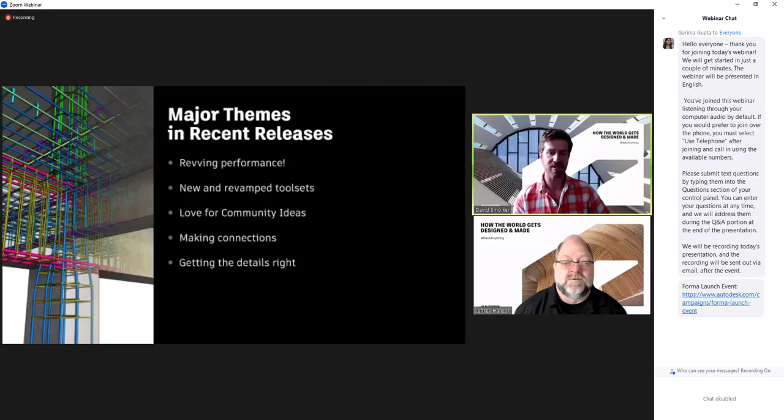So I work with the user community and our development teams to design content and learning experiences to enhance the user experience of Revit. And Jeff, when we talked about this webinar, I asked you to put together a list of ways Revit has evolved significantly in the last handful of releases. Now here is that list. Now let's start getting into it by talking about performance.

Yeah, so you experience performance every time you're using Revit, right? Our development team works really hard in the background on performance enhancements to overall improve your experience while using the software. Whether you see that or not in a feature, it's happening. And we're trying to keep your teams productive and on task, not waiting for Revit.

So when you add up all of these little things that we've done for performance over time, it really ends up being quite a lot. And in the end, you're not waiting for Revit anymore. Revit is waiting for you. Yeah, and that's great news for everyone using Revit. What else made your list, Jeff?

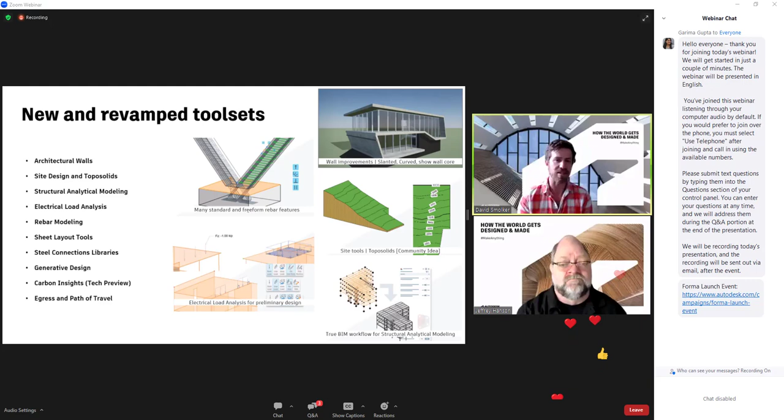And we're liking the feedback we see related to Revit 2024. In particular, we've seen improvements in CSAT—customer satisfaction—over the last couple of releases. So we're really making a lot of progress here. We have a lot of momentum with the way Revit is improving. Now, Jeff, I want to get to the next item on your list, which is data and connections.

Yeah, so to make things easier to work across broad teams and geographies, time zones, we've really made some significant changes in making Revit more open and more integrated with applications that you're already using. We've expanded upon capabilities with new tools like data exchanges, SpaceMaker, Twinmotion, Autodesk Docs, IFC. The list really goes on and on, with things we're doing to make it possible to work across teams easier.

And we know we have to evolve that way, Jeff. We see the need from our customers for more open workflows and a more open approach to navigating the AEC software ecosystem. So let's wrap it up by diving into the details. What are you seeing when it comes to the core design-to-documentation functionality of Revit that's improving recently?

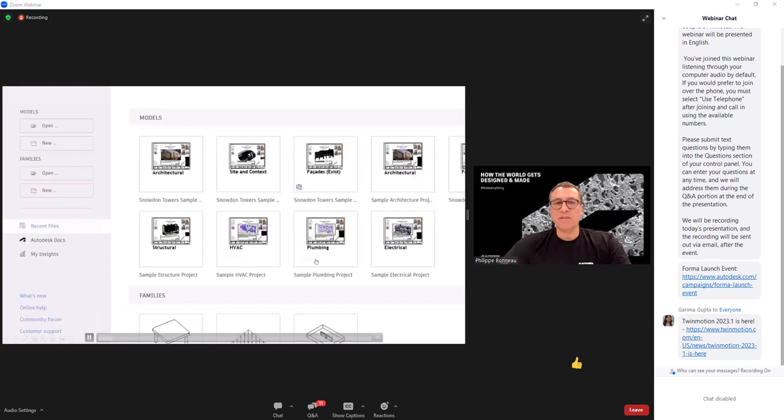This information is represented with insight cards. You can react to these cards, and you can click the Learn More button to get access to additional online content. You'll find the My Insights tab on the bottom left corner of the home page, and from there you can access a dashboard with commands that you are mainly using in Revit.

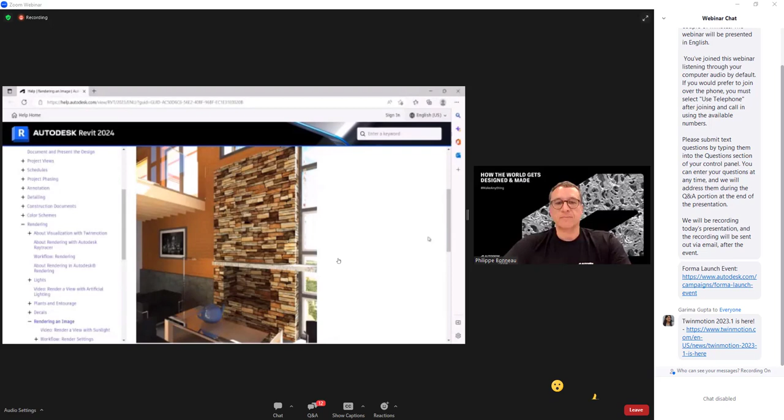Revit now supports the dark theme for first-level user interface, including the Properties Palette, Project Browser, Option Bar, Status Bar, and View Control Bar. You can set the drawing area theme from the ribbon, or in the Options dialog, where you can configure whether you want dark or light mode. The dark theme is also implemented with redesigned icons for both light and dark themes.

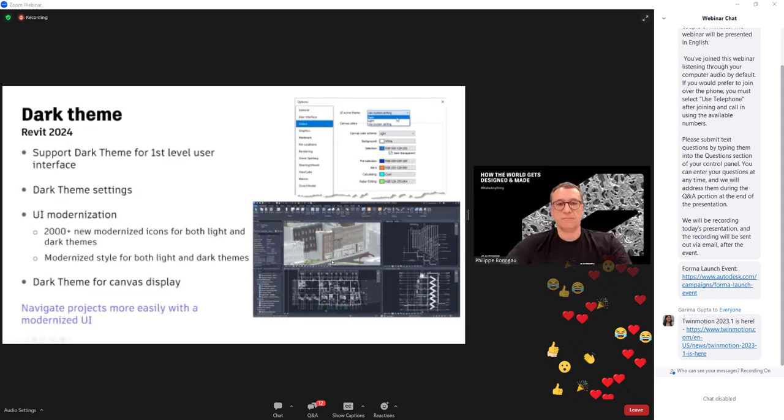If you go to File, Options, under the Colors tab you'll see new settings to define the theme as dark or light. Once this is done, you can also change the canvas theme to dark or light afterward from the ribbon.

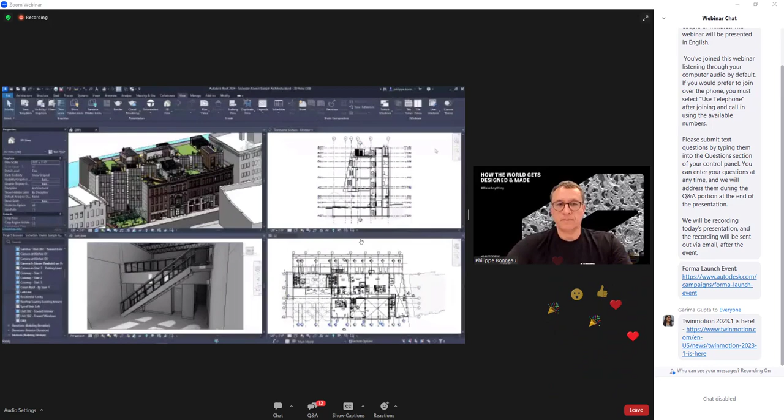In Revit 2024, we also have new sample models and new project templates. The sample project is a mixed-use project incorporating commercial, residential, and retail, distributed across several Revit models in keeping with industry standard best practices. If you wish to open the entire project, you can open each model individually or link them all together. The models included are architectural, site, structural, MEP, and also a point cloud RCP file. The goal was to create a compelling sample project that was interesting from both architectural and engineering perspectives, showcasing many of the most commonly used features in Revit.

We also have new project templates, with a new Imperial and metric English template, which are included with the standard installation.

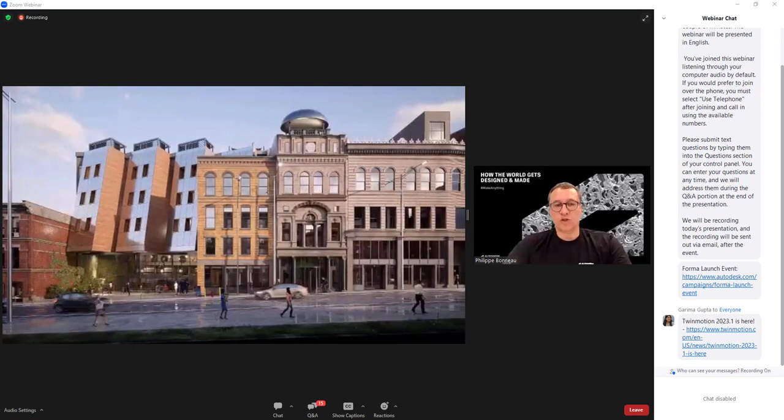If you want to find the templates and samples, just go to the samples folder. You have a cover sheet which shows the project in detail, and you can see how it looks in Twinmotion for Revit.

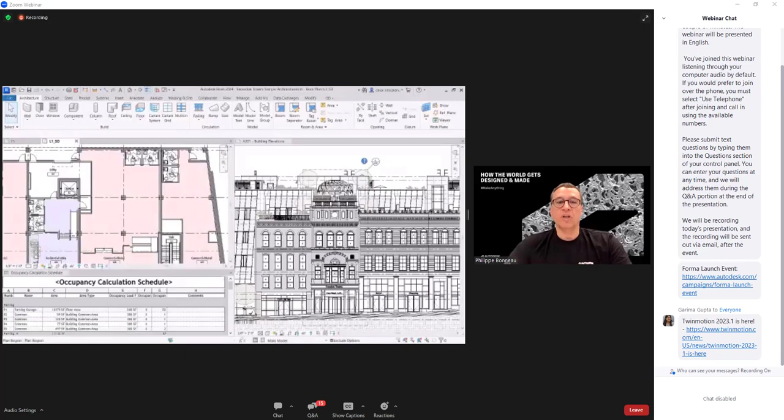With those projects, you have access to many 3D views, 2D views, documentation, and schedules. You can also find the point cloud file used to create the facades, and see how the structural and MEP models look.

The project browser has been modernized. We have a search function now available at the top of the project browser, so as you type in the search box, it shows only the entries matching that search term. This is very useful when you have a Revit project that may contain hundreds or even thousands of views, sheets, schedules, and families listed in the project browser.

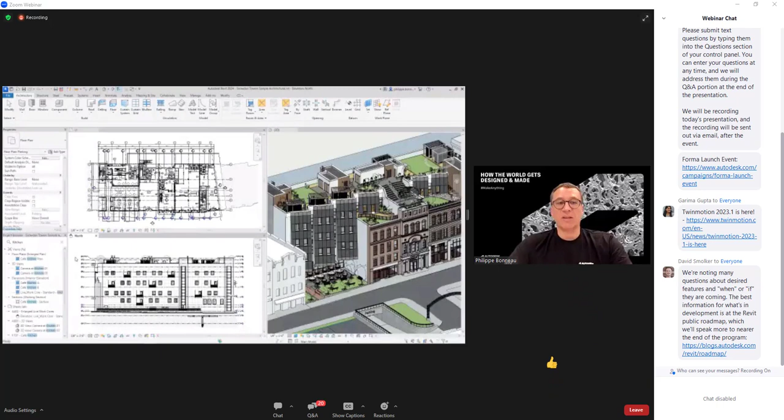Let's take an example. If I type L2, I can see very quickly views, sheets, and families which contain this word in the project browser. Another example with kitchen — so it really helps finding the right content in the project browser.

In previous releases of Revit, it was possible to link a Navisworks file from your local machine to help coordinate in 3D. In Revit 2024, the new link coordination model feature with files hosted on Autodesk Docs makes it easier for project teams to work together, keeping project files light and your work in sync with other collaborators.

You can link directly into Revit models and views from any of the 60-plus file formats that Autodesk Construction Cloud supports with Autodesk Docs. You can also underlay the coordination model as a visual reference when designing in Revit. And good to know, you can now link different versions of Revit models hosted on Autodesk Docs for coordination.

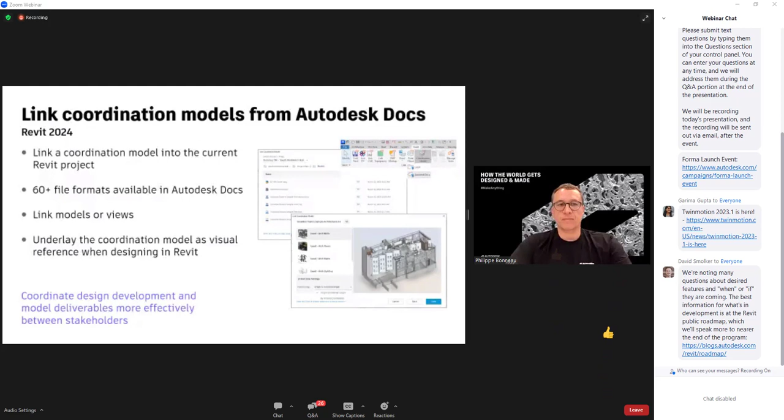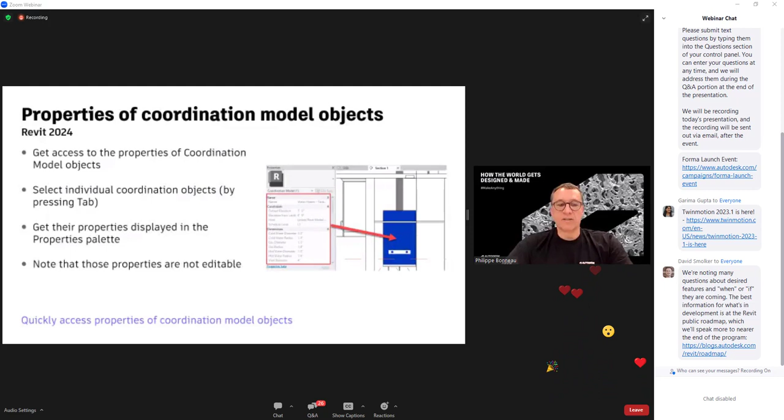You can view the properties of individual objects from a coordination model. Just select one of the individual coordination objects with tab, and you will get the properties of this object displayed in the properties palette.

You can also snap to points of a coordination model. This is controlled by a new Snap to Coordination Models option located in the Snaps dialog box. As an example, you can use the measure tool to get a distance between one object of your Revit project and another object from the coordination model.

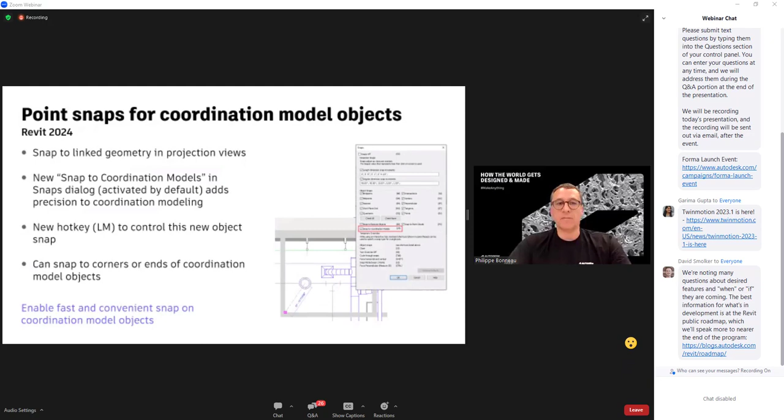As you can see, if you go to Coordination Model, Autodesk Docs, you can navigate through your folder. You see a lot of file formats hosted here on Autodesk Docs. We can, for example, use the one from the structural team.

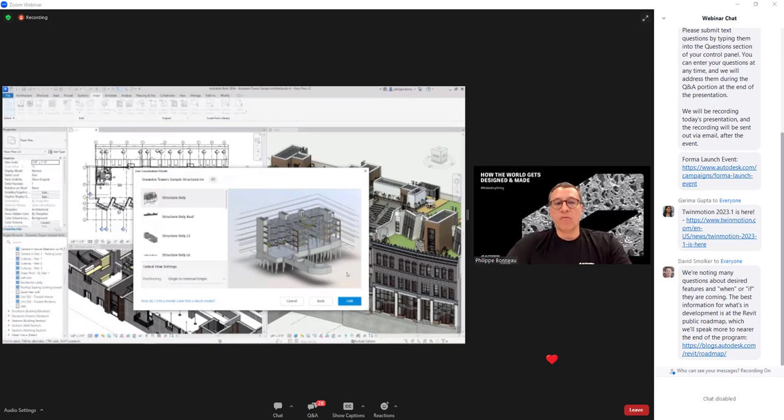Either we link it to the entire model or just a view, for example just a level. As you can see in all views here in my Revit project, I now get this coordination model linked. I can select one of those objects and get access to its properties. And I can snap — as an example, using the measure tool, I can get a distance between this object from the coordination model and the wall which was part of my Revit project.

Link and import PDF files is now available for our Revit LT users as well. You can use PDF files as a background in a floor plan, for example, or use it to trace existing conditions. And Revit will snap to PDF lines if vectors are embedded in the PDF file.

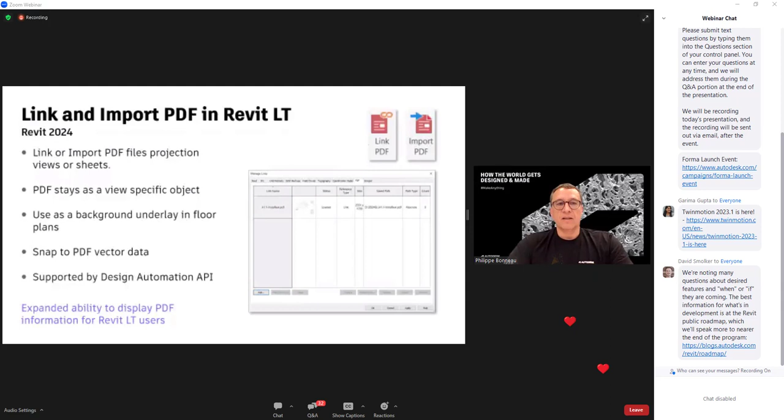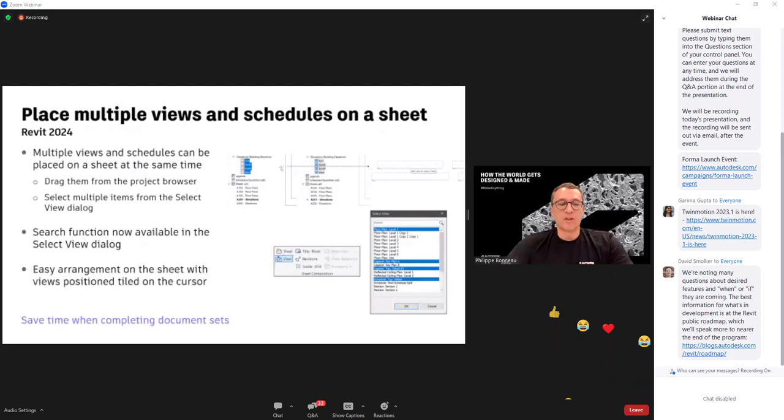Now let's talk a little bit about documentation. In previous releases, you had to place views onto sheets one at a time. In Revit 2024, you can place multiple views, sheets, and schedules on a sheet in the drawing area at the same time, for example with the drag and drop functionality from the project browser.

The Move View Align to Sheet command was introduced in the latest release, and in Revit 2024 it has been enhanced and generalized to Move Align to Sheet, expanded to support moving views, schedules, panel schedules, detail groups, and many more. Now you can easily move multiple elements between sheets while keeping their original positions.

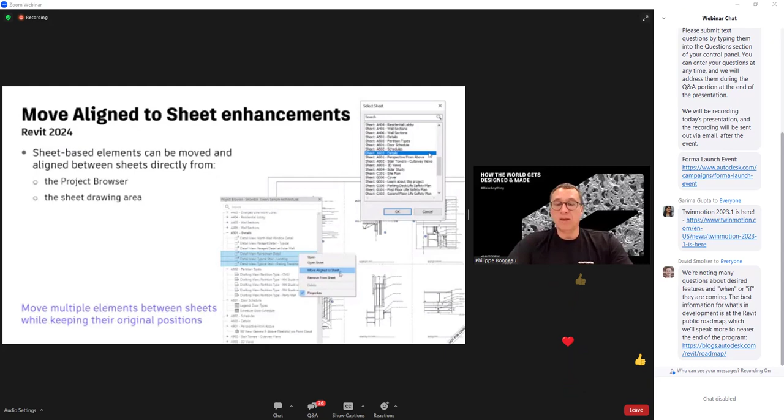We now have an Open Sheet command, available in the contextual menu, which means you can open a sheet directly from the drawing area. If you select multiple views or have a view on multiple sheets, a confirmation dialog gets displayed with the number of sheets that will be open.

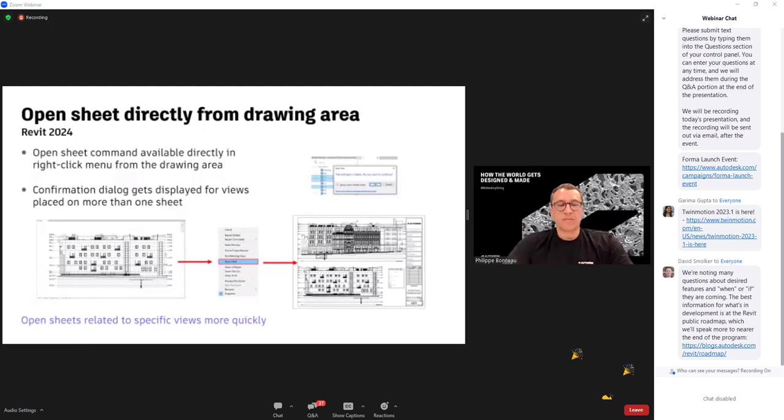You can now create a schedule of revision clouds. A new revision clouds category is available for schedules. You can use fields not only from the revision clouds, but also from revisions, views, and sheets to create your schedule.

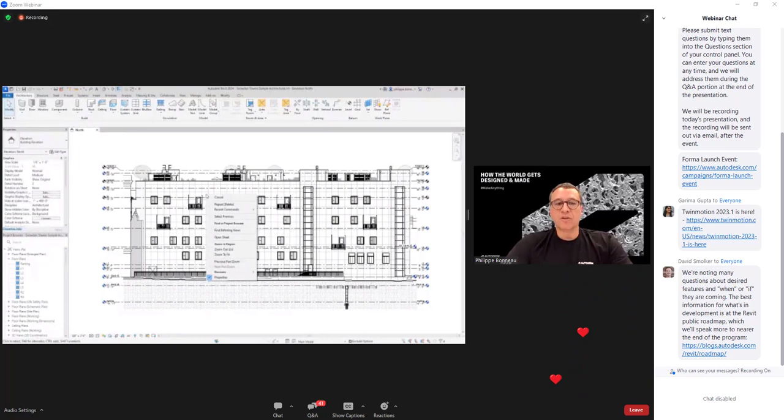Let's see how we can place multiple views and schedules on a sheet at once. It's much easier now to create your documentation. You can move views, schedules, and images from one sheet to another and get them aligned. You can select a view in the drawing area and right-click to open the sheet where this view is located. You can also create a schedule of revision clouds, selecting the fields you want to display, to get something like that.

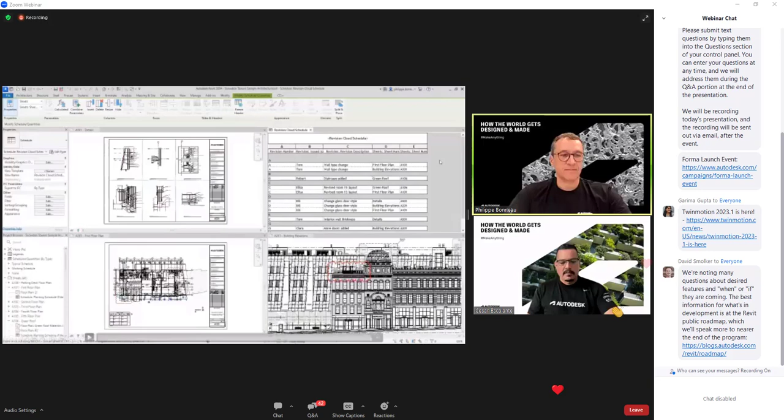Let's now take a look at what's in store for architects this year, and in particular for landscape architects.

New color book browser. This replaces how you can select colors. We have improved access to Pantone and RAL colors and made it easier to add custom-made color books. Use the Autodesk Color Book Editor to create your custom color book files. This is a web app available under the link displayed on screen, and it's been around for several years already. You can apply consistent corporate or branded color palettes in Revit by placing a .acb file under the file path C:\ProgramData\Autodesk\Revit 2024\Color Books.

Revit 2024 introduces a new visual style in response to customer ideas. Use the new textures visual style to apply the texture of render materials without lighting effects. This style maintains a consistent appearance of textures in the scene so materials are always displayed the same way no matter how they're oriented to the light source. This style expands your ability to create impactful representations.

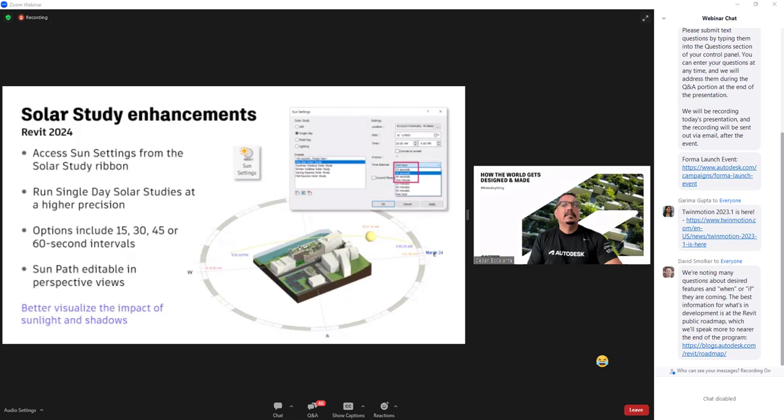The Solar Study user interface received several enhancements this year. Now you can access the sun settings dialog directly from the ribbon. Single-day solar studies reveal time intervals down to seconds—you can choose between 15, 30, 45, or 60-second intervals. Also, the sun path is now both accessible and editable in perspective views.

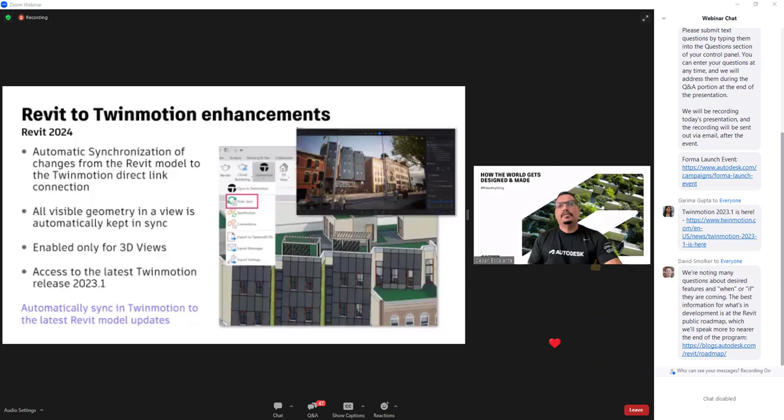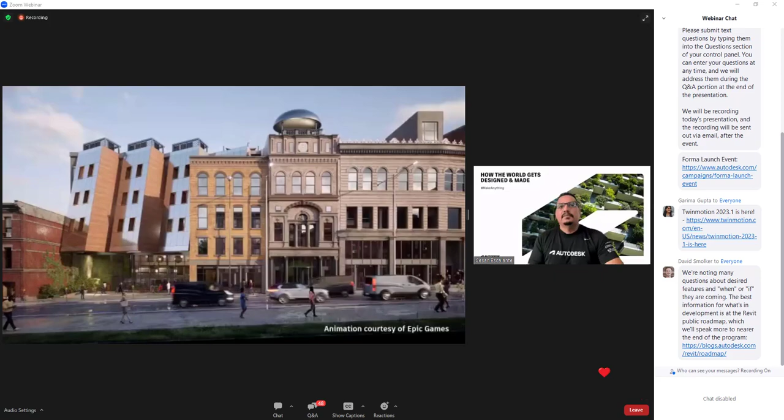Last year we announced the release of Twinmotion for Revit, which makes Twinmotion available at no cost to all our Revit and AEC Collection subscribers. This year, AutoSync functionality has been added to the Twinmotion Revit add-in. AutoSync supports automatic synchronization of changes between Revit and Twinmotion. A 3D view needs to be active in order to enable AutoSync. All visible geometry in Revit will be automatically kept in sync with a view in Twinmotion. Expedite your rendering updates and create better visualization with the AutoSync functionality of the Twinmotion add-in for Revit.

One of the most highly anticipated capabilities in 2024 is the introduction of new site design tools. Welcome TopoSolids. TopoSolids are a new category of families built as solid geometries. They have instance and type parameters and can represent diverse types of surface sections—for example, roads, sidewalks, soil infills, grade slabs, sports fields, water bodies, etc. Each type can be represented by different compound layers or different contour line representations. TopoSolids can be set up as room-bound elements suitable for open space programming. The instance properties of TopoSolids report a variety of dimensional parameters, including slope, perimeter, area, volume, elevation, and thickness, among others. Let's take a look at how TopoSolids can help improve your design documentation.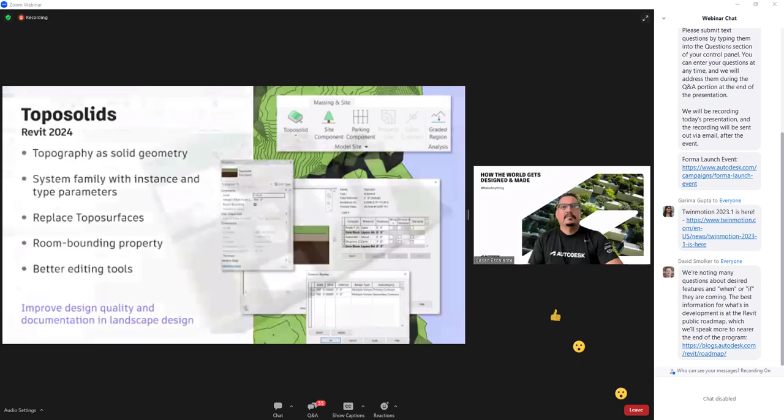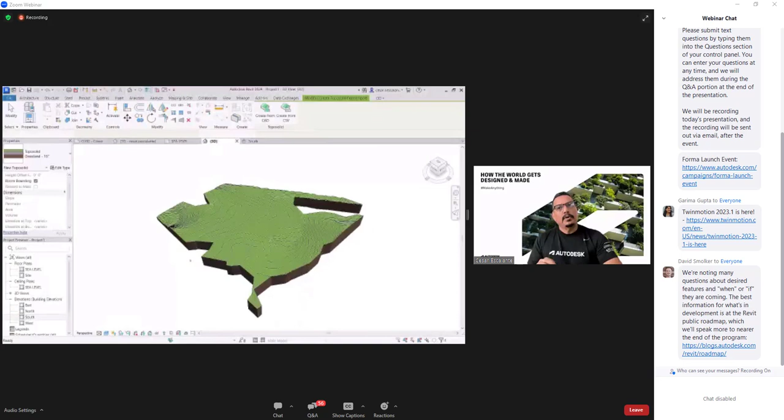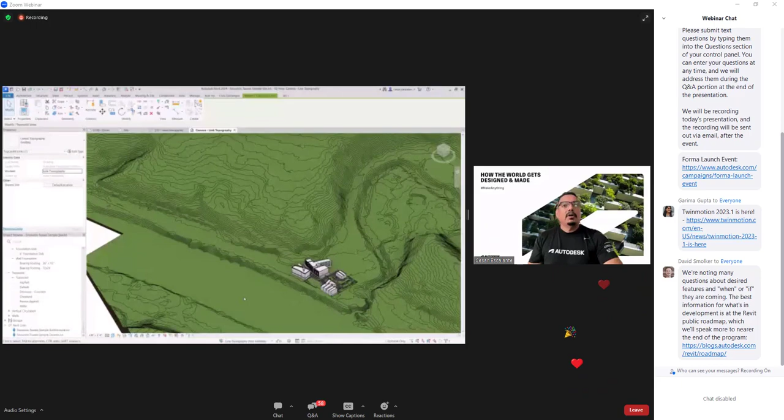The new reorganized icons under the Massing and Site tab reflect the new site design capabilities. There are two methods to create a TopoSolid: sketch the boundary and define elevation points, or create it from an imported file, either by CAD import or a point file in CSV format. TopoSolids replace the TopoSurface functionality from previous releases and are now represented as solid geometry. TopoSurfaces upgraded from previous versions can be converted into TopoSolids with the Generate TopoSolid contextual tool. You can still access the legacy TopoSurface settings. Linked topography generated from Civil 3D and hosted in Autodesk Docs will be automatically converted into a TopoSolid, and the property line data settings are now available as a standalone drop-down panel.

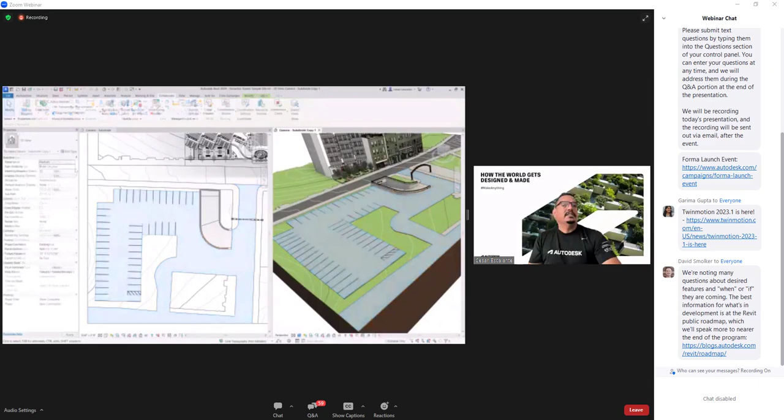Subdivisions. A subdivision is an offset region derived from a TopoSolid—for example, you can use a subdivision to draw parking lots, roads, or islands within a TopoSolid. Use the instance properties of a subdivision to apply a different material. The subdivision is positively offset from the original surface and must have a thickness larger than zero. The inherit contour toggle will display contours over the parent TopoSolid of the subdivision surface.

Boolean operations. Building pads are now retired, but existing pads in upgraded models can still be edited, though you won't be able to create new ones.

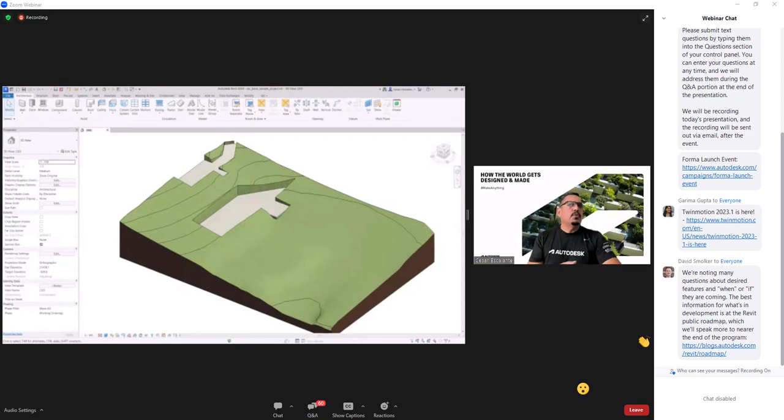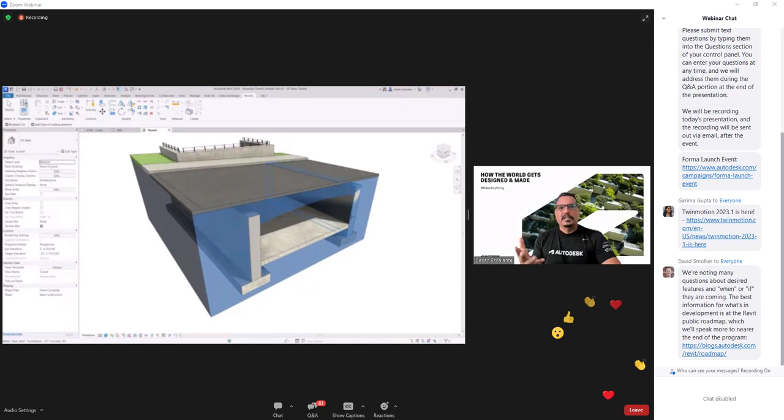To represent an excavation or a tunnel, cut the TopoSolid using in-place void mass families. In addition, you can cut a TopoSolid with elements of other categories, including other TopoSolids, ceilings, floor, slab edges, roof, fascias, gutter, soffits, structural foundation, walls, and wall sweeps.

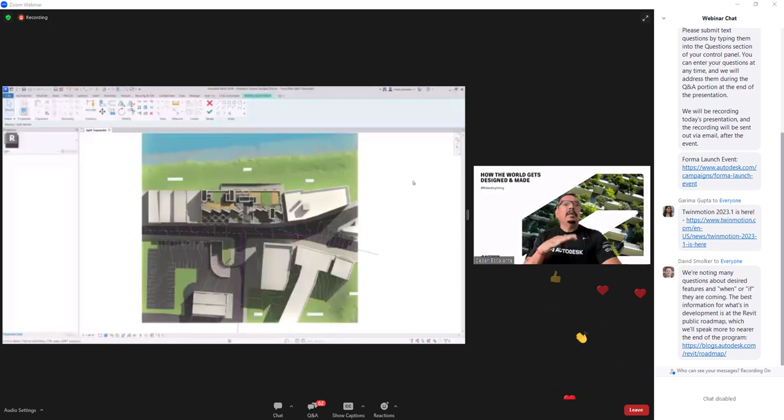Split. Use the split tool to split a TopoSolid into separate elements, using sketch lines as the cutting edges. Annotations such as spot elevations and dimensions will remain in place after the split operation. The split portion of the largest volume will inherit the original element ID. Subdivisions will be preserved if the split line doesn't cross it, otherwise it will be deleted.

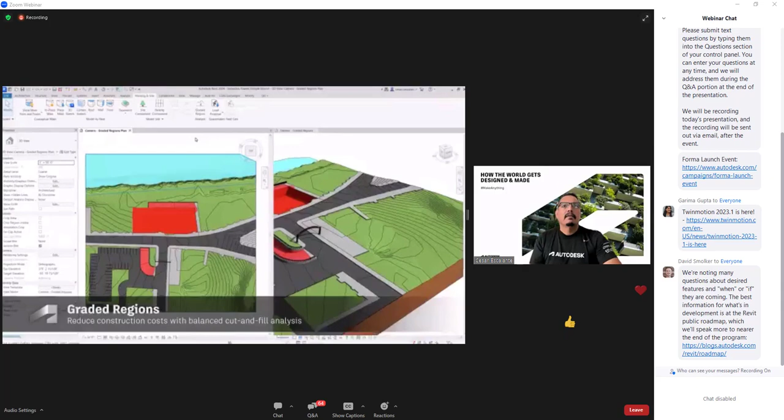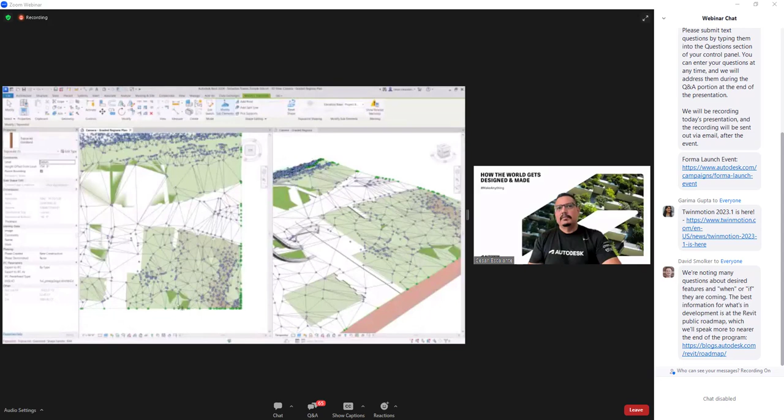Graded regions. Apply cut and fill volume analysis to TopoSolids using graded regions. The grading functionality is technically very similar to the legacy method. The grading tool marks an existing TopoSolid as demolished and makes a copy with a matching boundary in the current phase. Grade your topography using the point shape editor, where you can add, delete, or change the elevation points. Report cut and fill volumes of a graded region with a TopoSolid schedule.

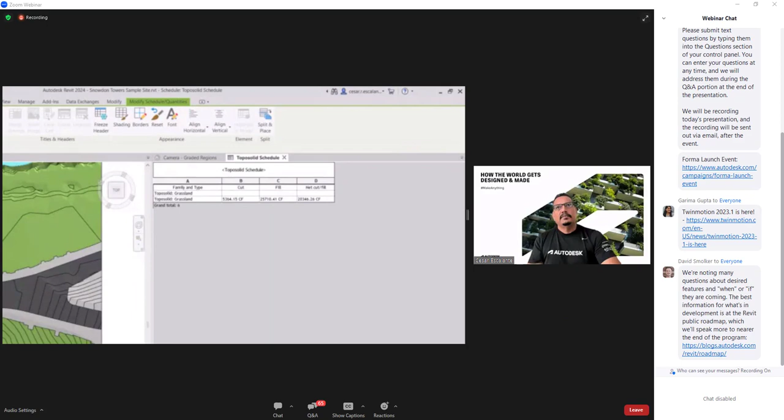You can preview the display of TopoSolid control points during pre-highlight and selection. The toggle is available as a drop-down panel in the Shape Editing tool. All the control points will be accessible when you modify and edit the TopoSolid. Turn it off to reduce the risk of performance issues on very, very large TopoSolids.

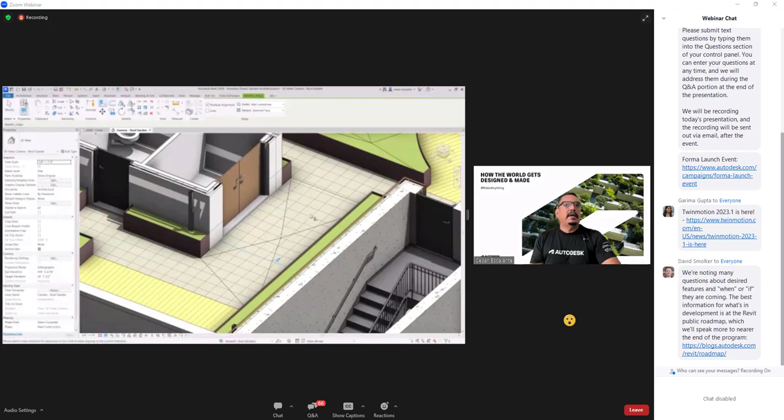Use the Align tool to align surface pattern on shape-edited elements, including toposurface subdivisions, floor, slabs, and roof. Use the options on the Contextual tab to specify whether the alignment applies across the entire surface or only to the face where the pattern line is selected. Note that patterns will still appear distorted on non-flat surfaces.

There are more capabilities to TopoSolid than I can speak to today. TopoSolid can host elements from the categories of railing, site, parking, and any floor-based element. Slab edge families can be applied to TopoSolid boundaries. This is, however, only available to flat topography at the moment.

And for developers, Revit 2024 added APIs for TopoSolid-related functions, allowing third-party developers to explore what's possible beyond what's provided out of the box. The bottom line: the new site design capabilities built around TopoSolid will really help you improve the design quality and documentation of your site design. I cannot wait to see what our customers will deliver using these new capabilities.

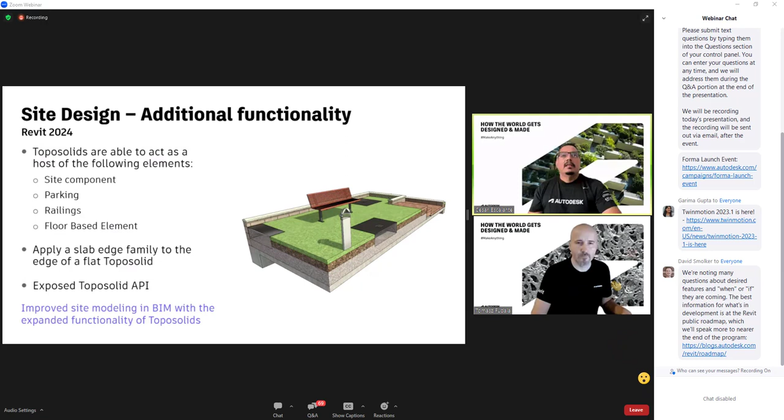Now let's look at the new features in the structural realm with Tomek. Thanks, Cesar.

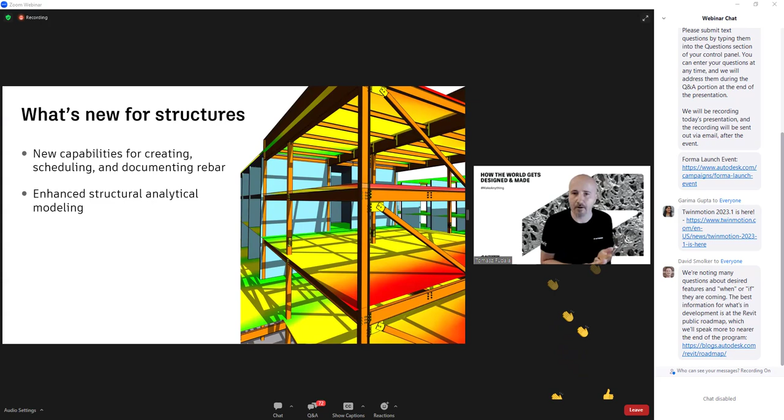So, for structural engineers, as in the previous release, the focus remains on the workflows and toolsets within the analytical modeling process. Also, structural engineers and rebar detailers have new capabilities for creating, scheduling, and documenting rebar. Let me begin with the new features and updates for concrete detailing.

Preparing the reinforcement drawings is an important task in the rebar detailing process. Reinforcement drawings are execution drawings that represent the reinforcing bars to be laid in the concrete. They serve as a means of communication between the designer and the contractor.

With Revit 2024, you can now add bending details to your reinforcement drawings to create accurate bar bending and installation instructions. Bending details are created as true vector geometry and will automatically update and change if the host rebar is modified.

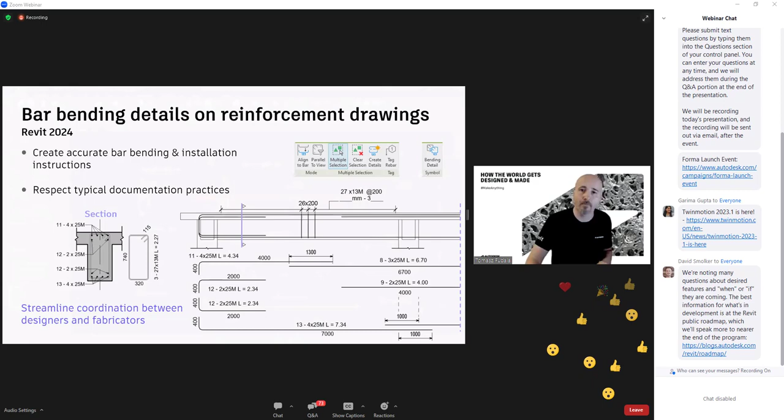Bending details can be placed in views by selecting the reinforcement bar and then selecting the bending detail command from the context ribbon. The detail can then be placed in a free location, or you can use the align to bar command to keep the detail orthogonal.

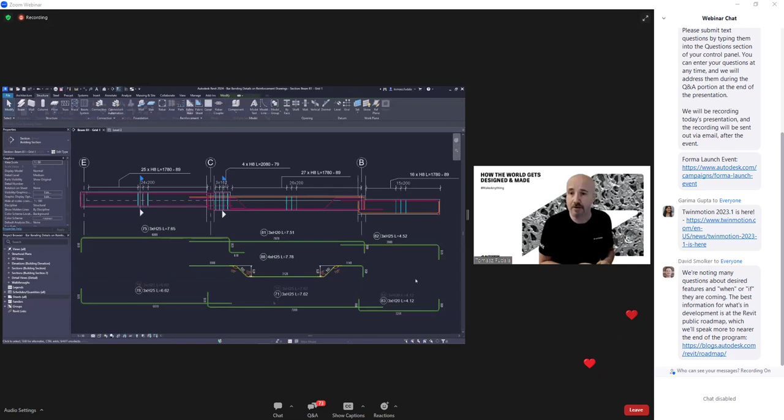The bending detail is driven by standard Revit type properties, allowing you to have multiple types that you can use in different situations. The bending details also make use of Revit dimension styles, so we can set up a couple of dimension styles to support the bending details tool.

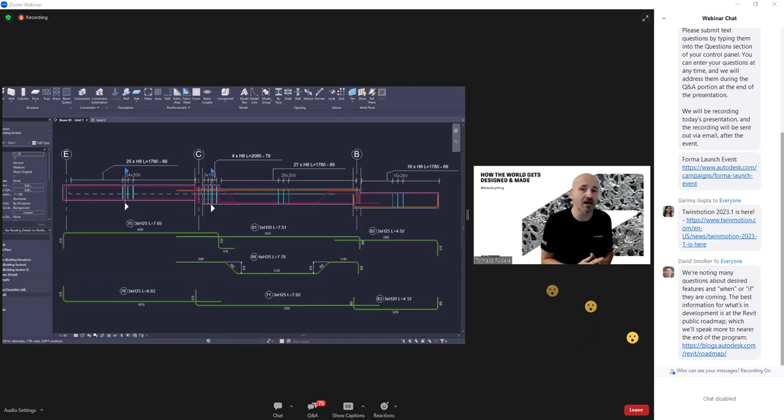You can also configure the amount of detail that is displayed within the bending detail. For example, you could simply show the segment length dimensions, or recover all the dimensions and angles for each segment, as well as hooks and linear dimensions.

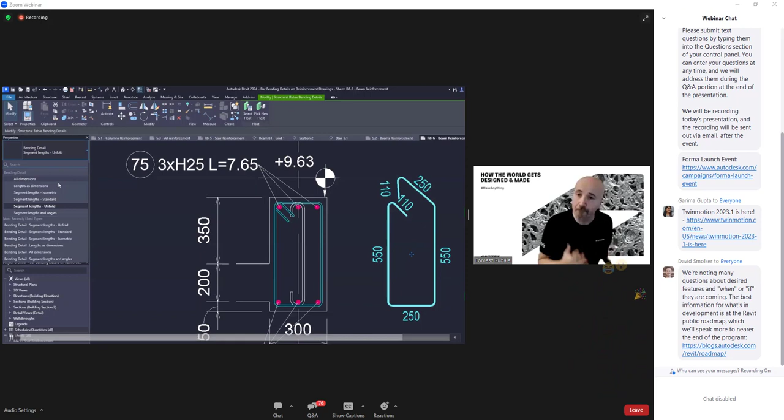There are also a few options around the unfolding or offsetting of bending details. When you have shapes such as links or stirrups that overlap, it could be confusing when showing lengths and angles of the hooks. Revit 2024 allows the bending detail types to have either standard, unfold, or offset.

The bending details can also be used in schedules, which is especially useful for non-standard shapecodes. However, it is worth noting that in many regions and countries, shapecodes and bending details are always shown and required in the schedule, regardless of whether the rebar is standard or non-standard.

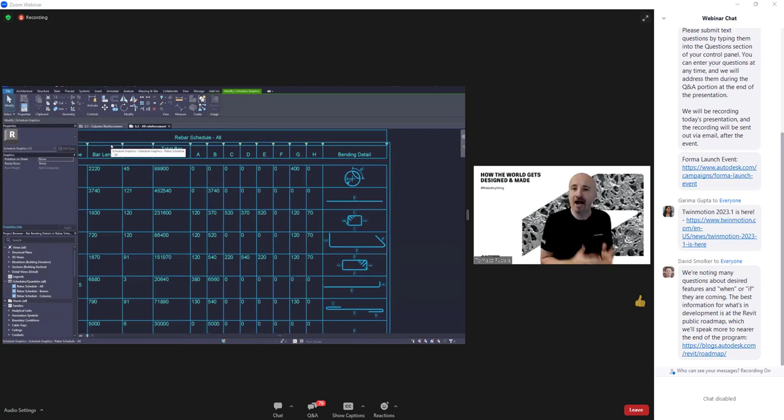You can choose between showing the rebar shape parameter names or the actual values of segment lengths. Similarly to images, bending details are only visible when the schedule is placed on a sheet. You can now resize all the rows in a schedule placed on a sheet to clearly represent its contents, including text, images, or graphics. This applies not only to rebar schedules. All these documentation features allow rebar detailers to create comprehensive rebar drawings according to very frequent industry practices.

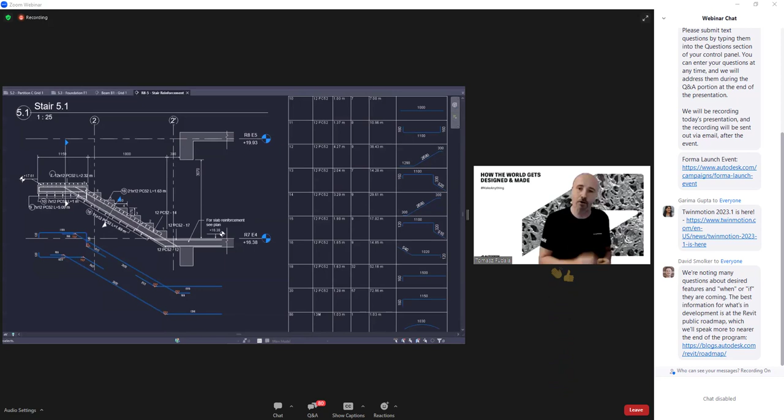When it comes to free-form rebar modeling in Revit, now you can choose how to align the bars in the rebar set, and also you can make the bars in the set parallel to the planar face selected in the align close constraint. You can set the alignment options for freeform rebar sets using the bar alignment parameter in the properties palette of the structural rebar, or by using the in-canvas toggle.

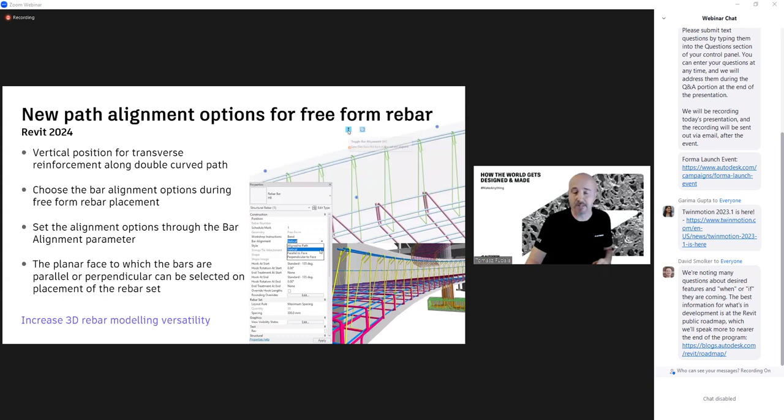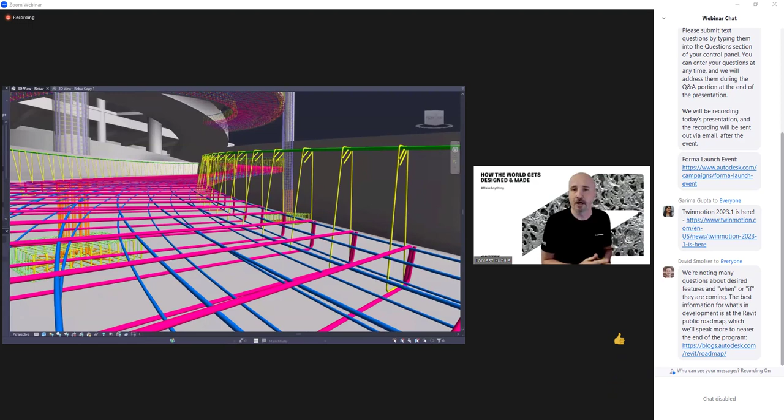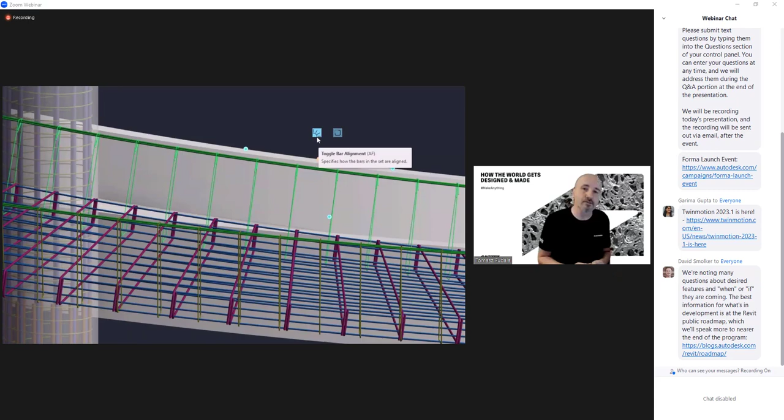You can also toggle the stirrup orientation for the aligned distribution by pressing spacebar. This applies only for the closed stirrup in the set. The ability to easily control the stirrup orientation for aligned freeform rebar, along with these new alignment options for freeform rebar, increases the versatility of 3D rebar modeling and helps you define accurate reinforcement for standard and non-standard shapes of concrete elements.

Now let's move on to structural analytical modeling. In previous releases, loads were divided into two groups: hosted loads and non-hosted loads. Non-hosted loads could be point, line, or area loads, but they would not update automatically and had to be recreated when the analytical model was updated. Additionally, placing point loads in precise locations was extremely difficult and had to be done in plan views with work planes.

In Revit 2024, the loads have been simplified and significantly improved. Now we have hosted loads only. Each load type comes with distinct options to help when placing the load onto the analytical element.

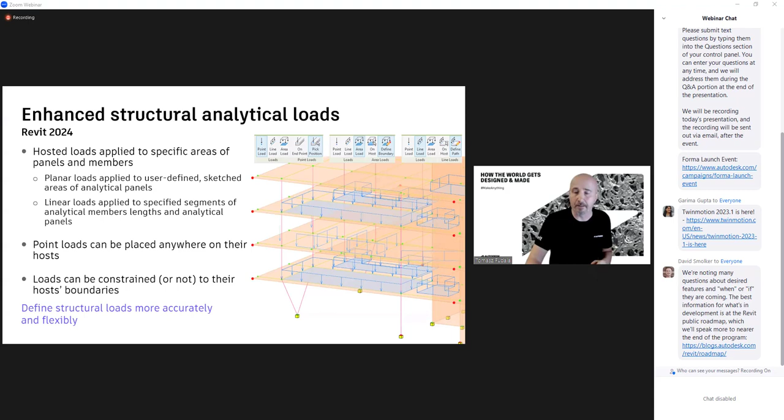Let's have a look. Now you can apply hosted loads to specific areas of panels and members. Planar loads can be applied to user-defined sketch areas of analytical panels. You can now also copy loads to other hosts easily. Linear loads can be applied to specific segments of analytical members' lengths and analytical panels. Point loads can be placed anywhere on their hosts. This more versatile and accurate definition of structural loads improves analytical modeling flexibility in Revit.

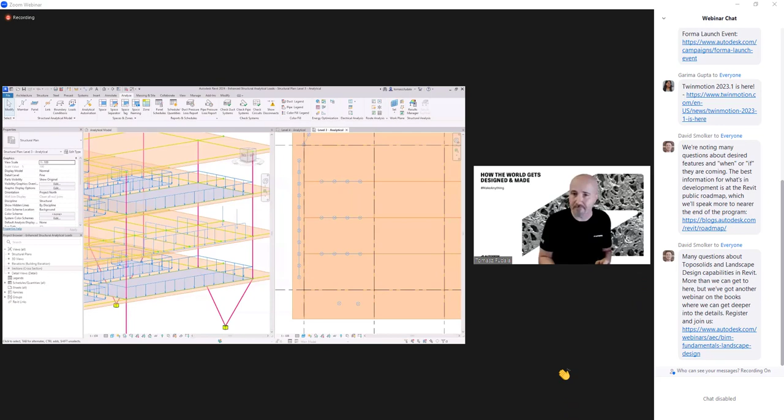Structural area loads can now be presented using color coding to differentiate between load natures, load cases, or values, resulting in clearer documentation of the analytical model. The visibility of loads can also be controlled with view filters, enabling the creation of parametric loading plans, something that many users have previously achieved using filled regions.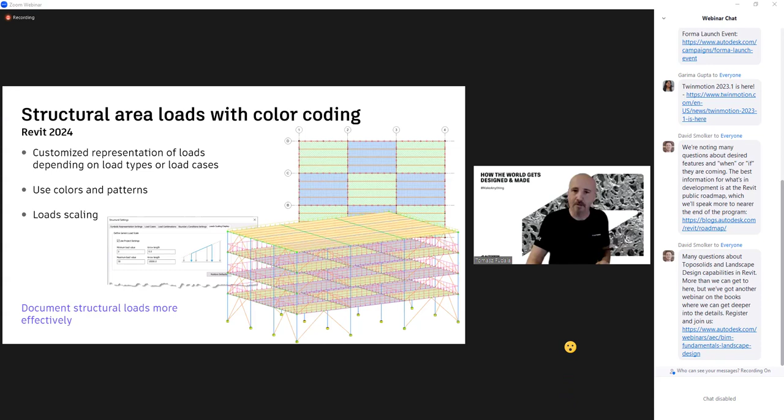When working with loads, the scale can now be controlled via the structural settings dialog box. Here you can set the minimum and maximum load value and set the actual length of the arrows. This is useful to visually check load magnitude.

Now you can create multiple associations between structural elements to better coordinate updates across the physical and analytical models. You can now associate multiple analytical panels or members to a single physical object, or vice versa. For example, you can use several analytical panels to present a single physical floor, or associate several beams to a single multi-span analytical member.

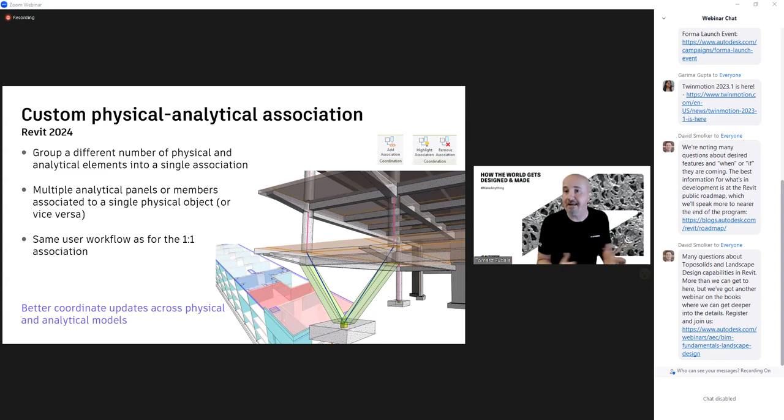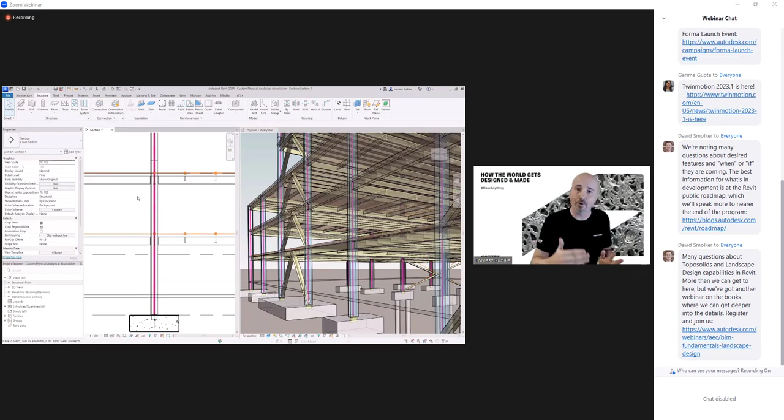To create an association between two analytical elements and a single physical element, you first need to select the first analytical model. Next, you should run the Add Association command from the ribbon panel and select the second element. Finally, you can select the physical element associated with these two analytical elements. Once you have completed these steps, you can select the physical element and click Highlight Association to review the two associated analytical elements, which will be highlighted.

As Revit is currently recommended as central to physical and analytical model coordination, and its analytical model geometry can be accurate and fully versatile, the nature of the Revit-Robot interoperability was adjusted. A true bidirectional geometrical exchange is now focused on the analytical model and its material and section properties.

As you have already heard, the Revit 2024 release introduced a new way of defining structural loads. The new load definition is fully transferred to Robot Structural Analysis Professional software. Other improvements I'd like to highlight: we have enabled the transfer of analytical panels created by extrusion in Revit, enabled the assignment of the default steel design type in Robot when transferred from Revit based on the analytical member structural role defined in Revit, and you can also transfer arc members from Revit to Robot, among other updates. The enhanced link between Revit and Robot better supports BIM-centric structural analysis workflows.

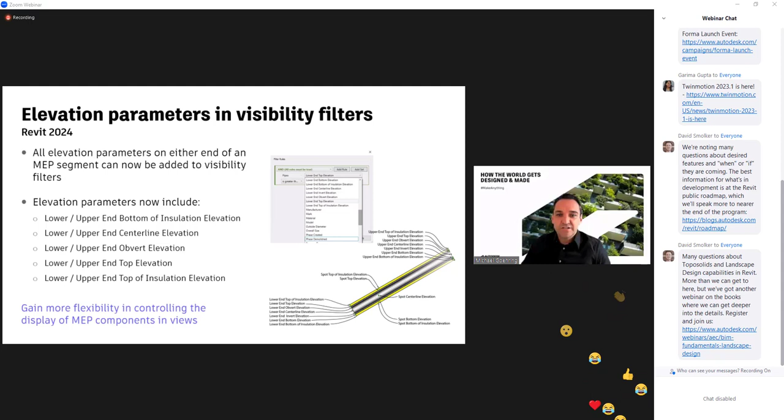In Revit 2024, you have access to additional elevation parameters to control the visibility of MEP components in your views. These improvements will help you document for installation on sloped MEP segments more efficiently.

Revit 2024 has wall thickness as a built-in parameter for pipes. This wall thickness parameter is available for pipe tagging and scheduling. You can also use this wall thickness parameter in view filters to control the appearance of pipes in a view. The pipe thickness is automatically derived from the design pipe's outer and inner diameter, so you can easily create documentation for pipes based on the information available in the model.

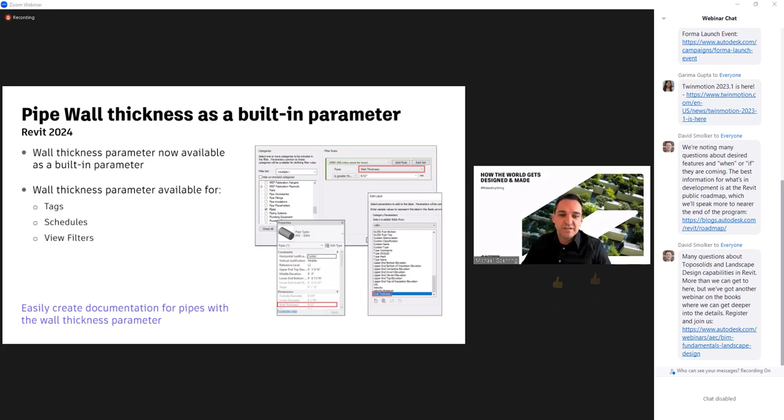In previous releases of Revit, the insulation remained visible when hiding duct and pipe with insulation. In Revit 2024, the insulation gets hidden regardless of the method you use to hide the insulation on duct or pipe elements. This gives a more predictable behavior when hiding ducts and pipes, including their fittings and accessories.

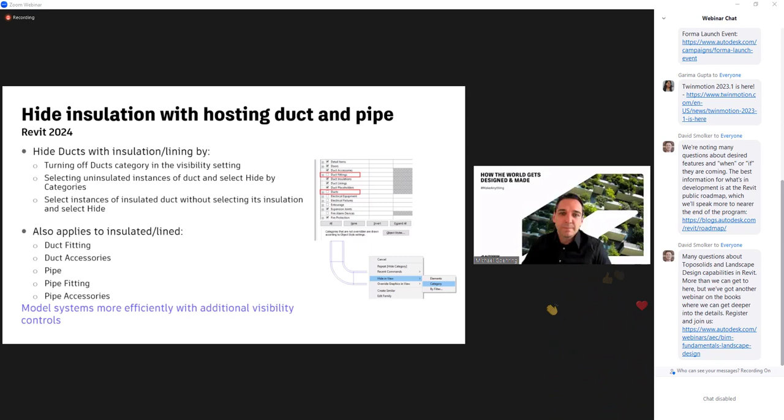To integrate design and fabrication workflows, network-based calculations for flow and pressure drop are available for design ductwork. Use the Networks tab in the Mechanical Settings dialog to enable the calculation engine for ductwork. When enabled, calculations run in the background, so you can continue to keep working.

Now we apply the same behavior to ducts like you're used to when working with closed hydronic networks. This feature introduces more integrated design and fabrication workflows for mechanical engineers.

New capabilities for energy analysis provide workflow simplification, especially when working with linked architectural models. 3D views can now be chosen to more selectively define what elements are used in the energy analytical model creation. This improves the accuracy of your energy analytical model, as well as it speeds up the model creation.

You can use a 3D view template to have your 3D view predefined for generating the analytical model quicker than ever.

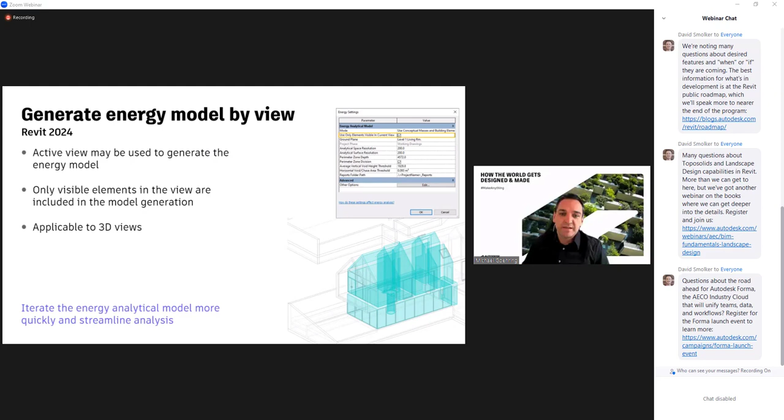A new MEP fabrication ductwork stiffener command is available under the System tab. This command enables manual placement of loaded stiffener families. Currently, stiffener families can be placed and hosted onto straight segments of fabrication ductwork. After placement, the hosted stiffener instances will move and resize with the duct segments as users make modifications.

Revit 2024 comes with typical ancillary framing families used to construct duct stiffeners, including angle irons, struts, rods, angle rings, and more. You can create a schedule with MEP fabrication ductwork stiffener embedded into a fabrication ductwork schedule.

When you export the fabrication ductwork in a project to an MAJ file, hole information will be generated based on internal stiffener locations and shared subcomponents. This allows you to generate more accurate cut patterns in legacy fabrication products such as CamDuct.

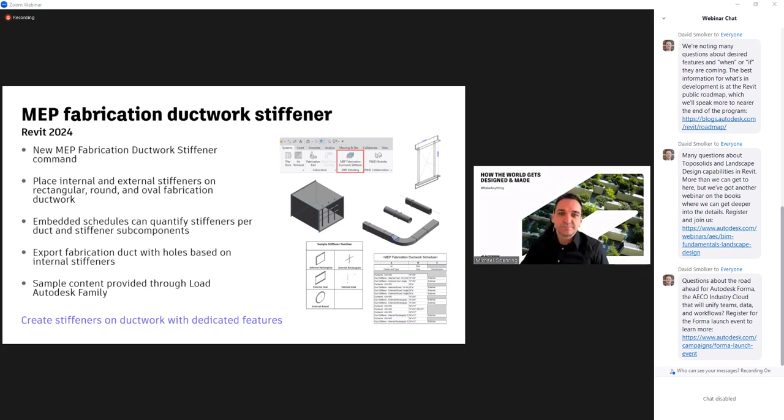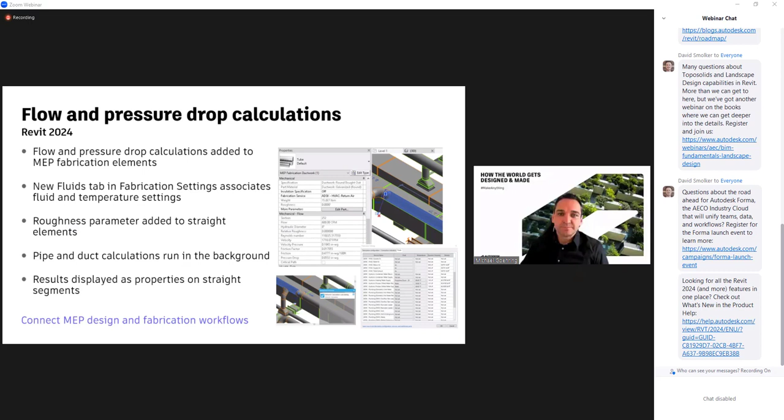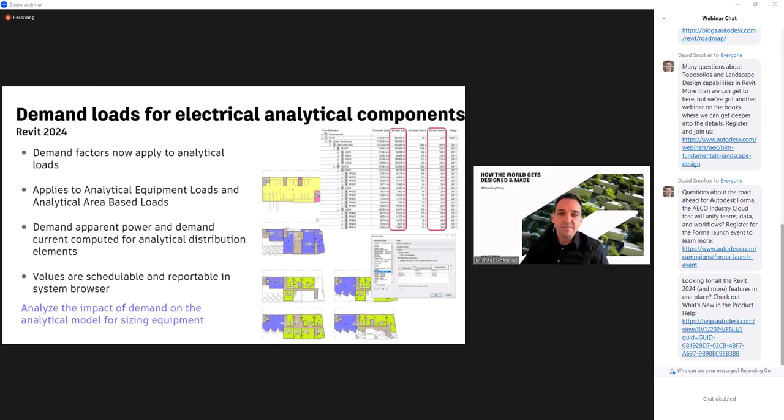These evolving capabilities for electrical analysis support electrical engineers looking to reduce overall design time and improve quality when working with BIM. And with that, I hand it back to David.

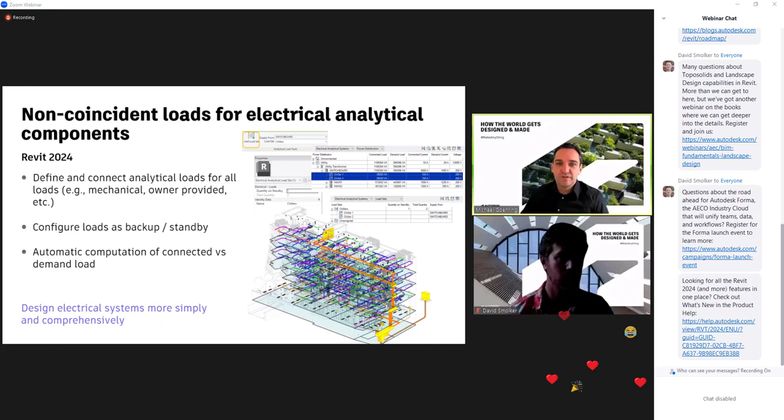Thank you, Michael. Many powerful enhancements in 2024. Can we give a recognition for our technical team for putting together that presentation? They really have not a lot of time to put together a lot of content. So we really want to appreciate Tomek, Michael, Cesar, and Philippe. Thank you, gentlemen, very much appreciated.

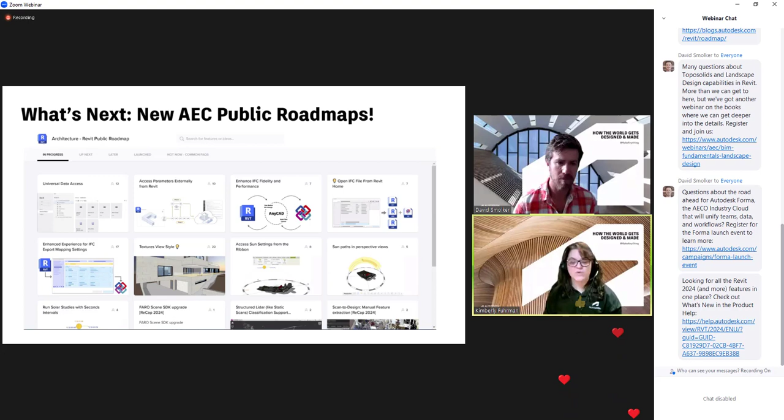So the first thing I have for you is a revamped public roadmap. These are a lot of fun. Let's see if my clicker is working. So with the public roadmap, you can go right to our blogs, our Revit blog, and David has put that, or Rima has put that link in the chat.

And so as you scroll down, you can see, first of all, our safe harbor statement, because of course we can't make any promises, but we do want to show you what our plans are. So we have separate sections for each discipline, and at the top of each section you can see this is a basic kind of timeline for our development. So we have in progress, up next, later, launched, and the ever popular not now, but you can see why on those tabs. Each card you can click on for additional information.

And as you scroll down, you'll see that there is also opportunity for you to rate how important this feature is to you, whether it's not important at all or whether it is critical to your work progress. So you can give us additional feedback there. Once you click those buttons, you can give us actually some comments on why that's important to you.

And so again, with each of these, as you scroll down, you'll see the different disciplines, and these are being continually updated by our product teams. They are continually being monitored by our product teams for your feedback and comments. So feel free to explore those and add additional feedback for us. We love your feedback, we really do. Okay, and as we go on, hopefully, I think I can click through this.